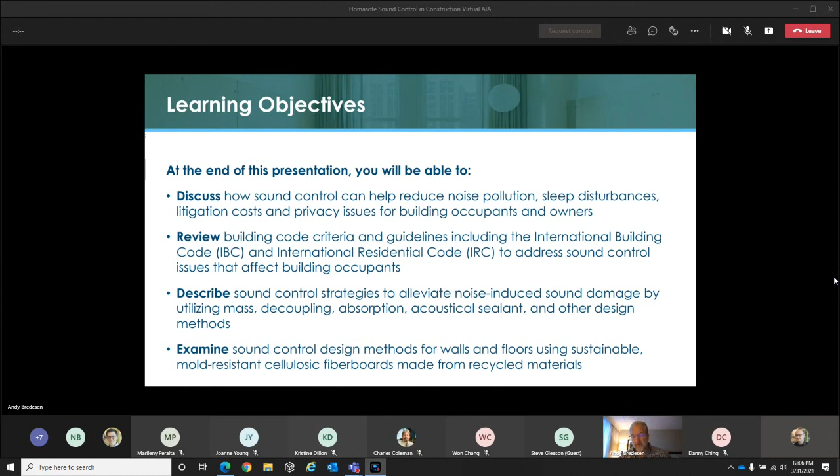The agenda covers 5 categories: sound control in the building industry, building code criteria and guidelines used to assess sound control, theory and the terms that go with it, the strategies of sound control, and finally addressing sound control issues.

So starting off, let's look at sound control in the building industry. There you go, noise pollution. It's everywhere, and it was everywhere before it became code in 2003 to address it in construction.

But so many times, especially in the last 10 years or so, people are moving to more metropolitan areas. Those without cars want to be by the metro line. And so builders are building high occupancy 2-over-2 townhomes and condos in communities where there's retail and restaurants, and there's also noise. So it affects all of us.

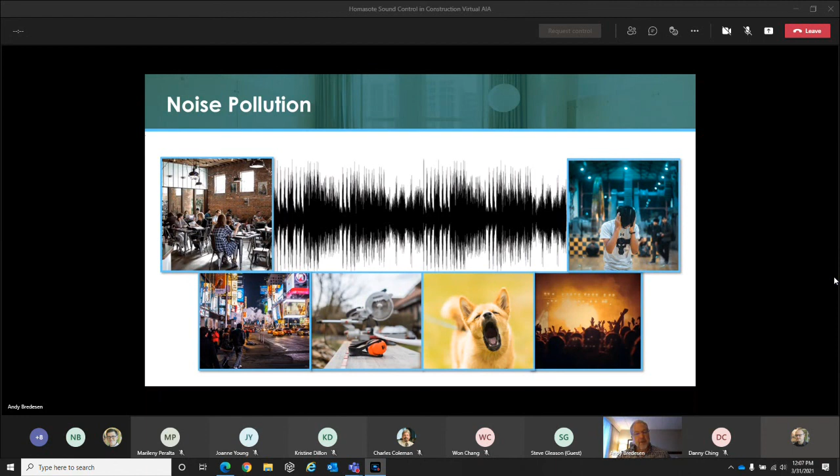The importance of sound control is different depending on your relationship to it. But to the consumer, it affects your sleep, your productivity, and your privacy, whether you're in your own condominium, apartment, or hotel.

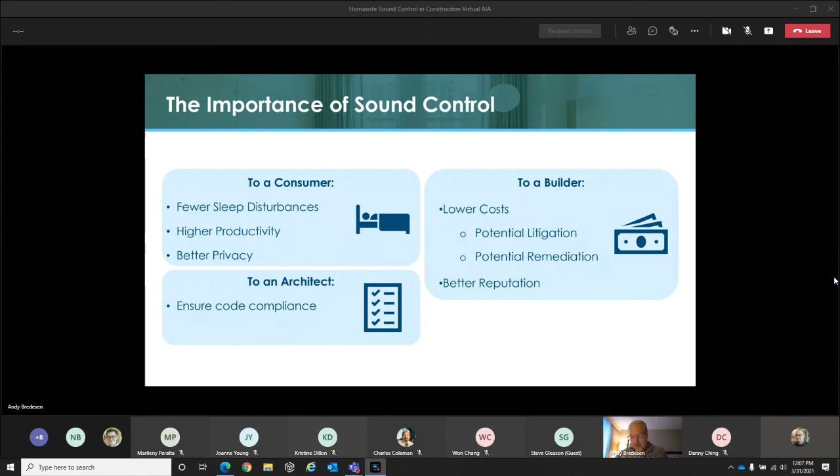To the architect, we want to make sure that we have code compliance. And for the builder, we want to make sure that we build to code so that we avoid potential litigation and potential remediation to bring things up to code. And that all affects the builder's reputation.

So cost considerations: when you talk about litigation, sound is one of the top 3 litigation costs behind mold and foundation settling. One major builder reported that they have at least 14% sound failures, and it doesn't always have to do with the product used to control sound, but its installation, and whether it's done correctly. When you talk about remediation costs, if a building does not meet code, it can exceed $32,000 per multifamily unit to bring it up to code.

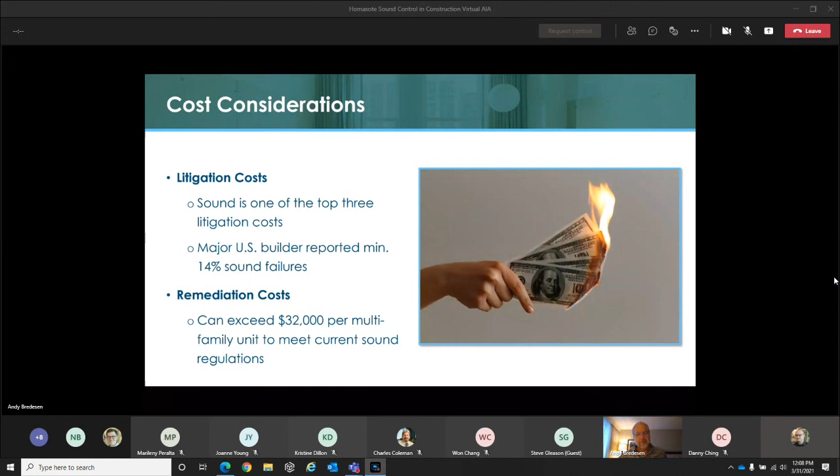So talk about reputation. I'm sure if we were in a room and I asked you to raise your hand for anybody that goes on to crowdsourcing formats like Yelp or others, you can relate to this. You don't just go looking for great restaurant reviews, but sometimes people go and complain, and this one we pulled off the internet.

The room was clean, the staff was friendly, but the walls must have little to no sound barrier. We would clearly hear conversations among other activity next door, and the guest above us sounded like he was walking in our room. We had to be moved at 12:30 a.m. We're never going to stay at this facility again.

If you're the owner of that hotel, you can't afford to have this put out there, and yet it's done every day. I would say, just from personal experience, I stay in hotels quite a bit, and even hotels that are newer and built after 2003, I still really wonder if they were built to code with regard to sound, because so much of the time you can hear conversations so easily in the room next door.

So where do we need sound control? I think we need it everywhere, but specifically, let's look at this. So multifamily is what we're addressing here: apartments, condos, dorms, senior housing, duplexes, townhomes, but not just residences. It's also for offices, hotels, education facilities, and healthcare.

So now let's look at the building code criteria and the guidelines that we use to assess sound control. IBC 1206, and this was changed a few years ago. It was IBC 1207. Up until recently, they changed it to IBC 1206, but we address two different ways of looking at sound. First is airborne sound.

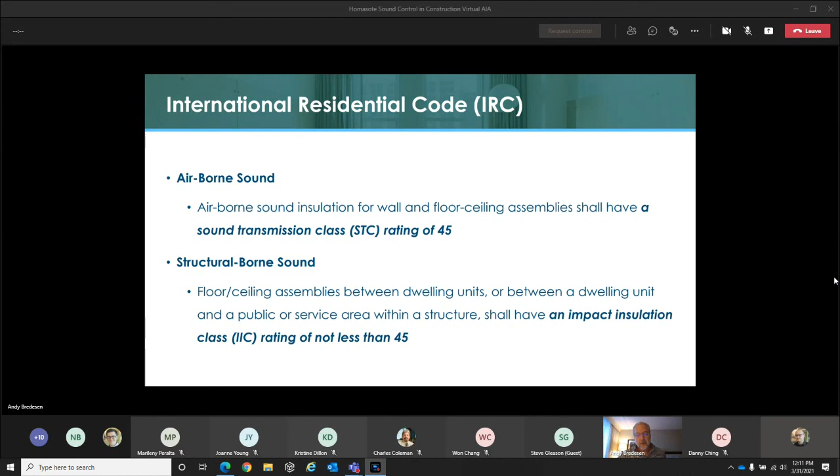So that's the IBC. And now we look at the IRC, the International Residential Code. They address both of these same sounds, air and structural borne, but they only require a 45. And let me back up a second and say that if you do field testing for the IBC, all you need is a 45 as well. So you can get it to a 45 by doing the field testing.

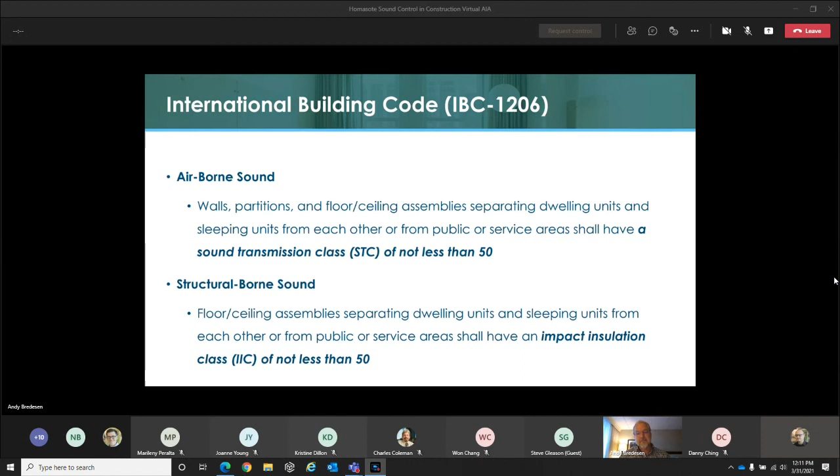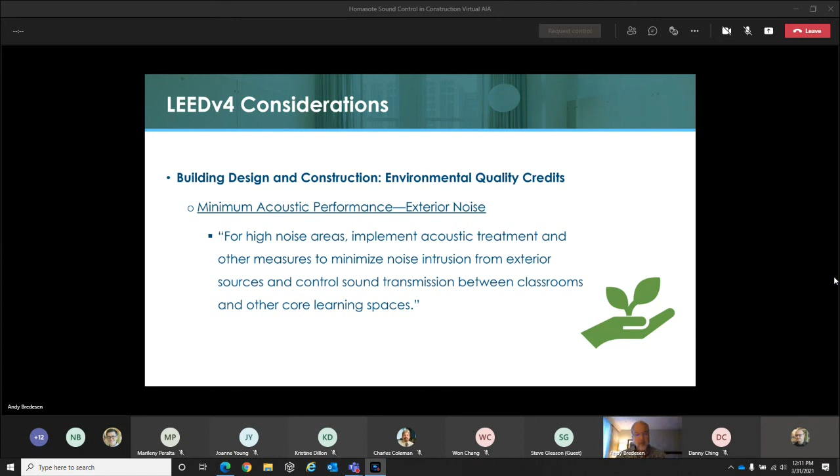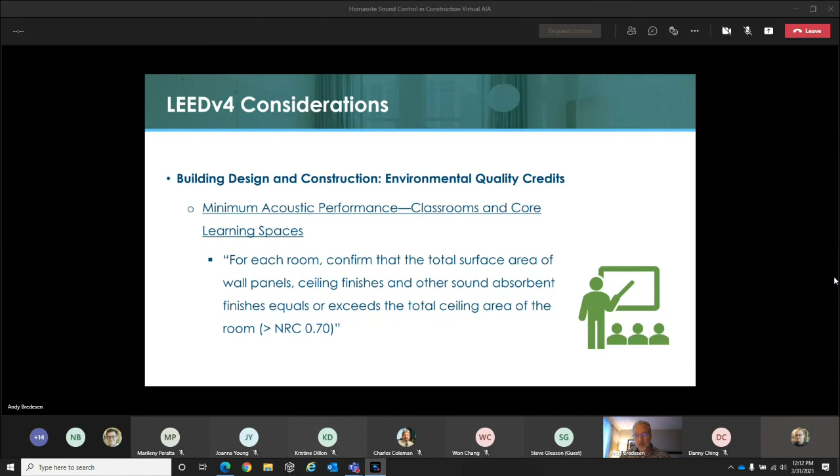So now, what are the sound control theory terms? I like this: when is something too loud? Well, I think this is very subjective. Something may be too loud for me, but not you, or vice versa. So it's subjective to the person.

It's said that noise-induced hearing damage is related to the duration and the volume of exposure to that noise. According to the National Institute of Occupational Safety and Health, the safe exposure limit is 85 decibels for 8 hours per day. And a decibel is a unit that measures the intensity of the sound.

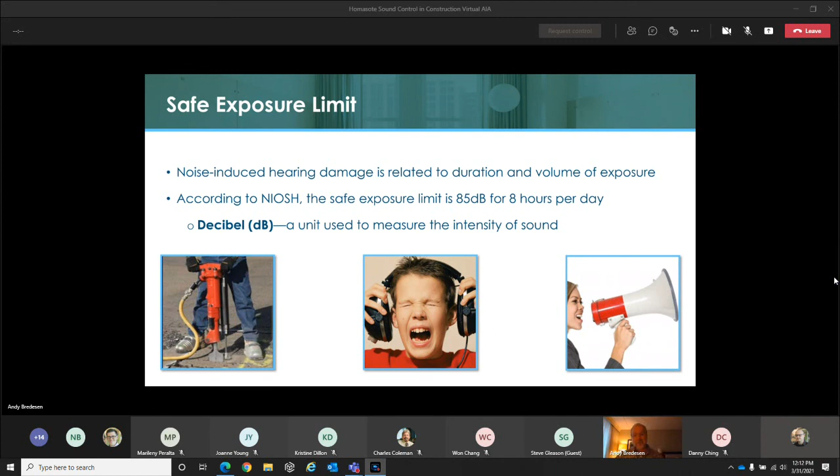And now let's talk about sound transmission class specifically. STC ratings assess a material or an assembly's ability to resist airborne sound transfer. The higher the number, the better the resistance.

So let's look at some of them—the STC ratings on the left. If you start at the first one, at 25, you can hear normal speech and it's understandable through the wall or the floor. Obviously that is poor. As you move up the scale there, you get to a 40: loud speech is audible, but you can't really make out what's being said. I'm not so sure that I would call that good.

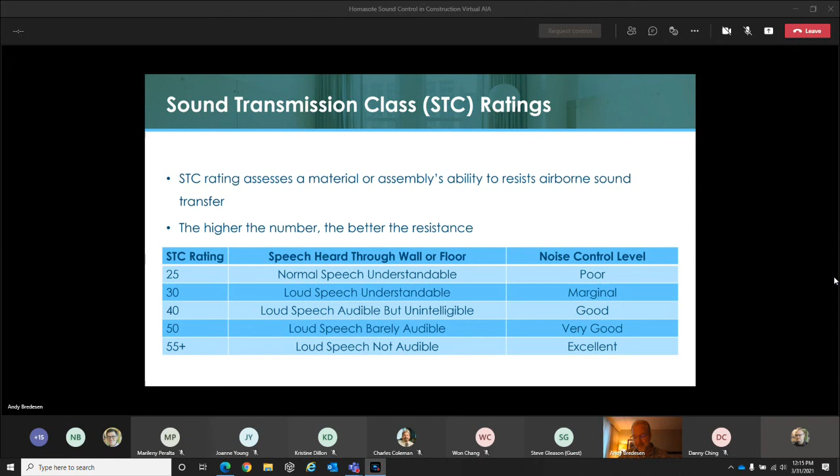That's considered very good, at least it's a benchmark for code to get us to a level where it's acceptable. And if you get above 55, loud speech is not audible. We're seeing also in some major cities like New York City, for buildings that have condominiums selling for $1 million, they're willing to put more money into the wall and floor because they want to get that floor up to an IIC of 60 or greater. It's too important for them not to have the owners of these properties satisfied.

STC testing, Steve's going to take this one. Sure, thanks Andy. So before we get into the nuts and bolts of how you would graph out an STC test, just a few words about testing in general. You're designing sound control components for a wall or a floor ceiling assembly. You're going to find there's a lot of acoustical spin out there in the marketplace. Get your hands on a sound test and read it and find your best way to understand it. There's going to be a lot of verbiage that gives you hints about or real data about how this assembly is designed relative to your needs - things like fastener size and spacing, joist spacing, joist size, types of insulation, types of drywall. IIC and STC testing documents are important.

Let's take a look at an STC test for a wall. The way they do this is they build the wall in a sealed assembly between two acoustically balanced rooms. They blast out 115 decibels in the source room and measure it in the receiving room and graph it out as you see here. The bottom horizontal axis is frequencies and the vertical axis is sound transmission loss numbers, and remember the higher number is the better number. They'll graph that as a broad frequency spectrum of sound - that's the blue line you see.

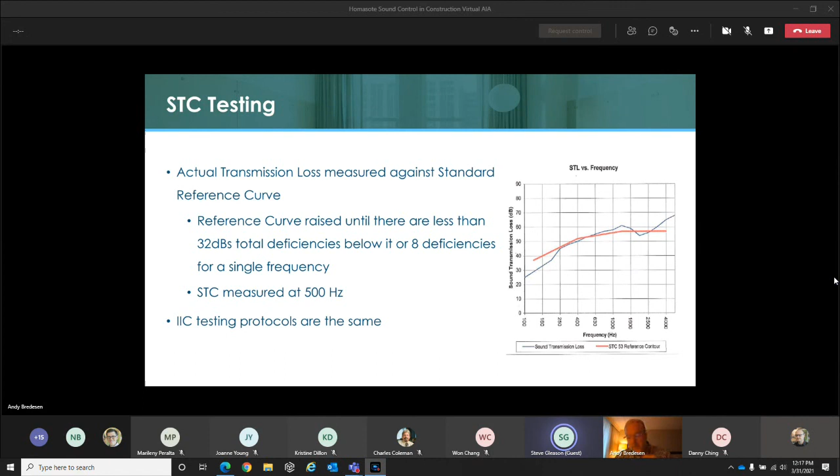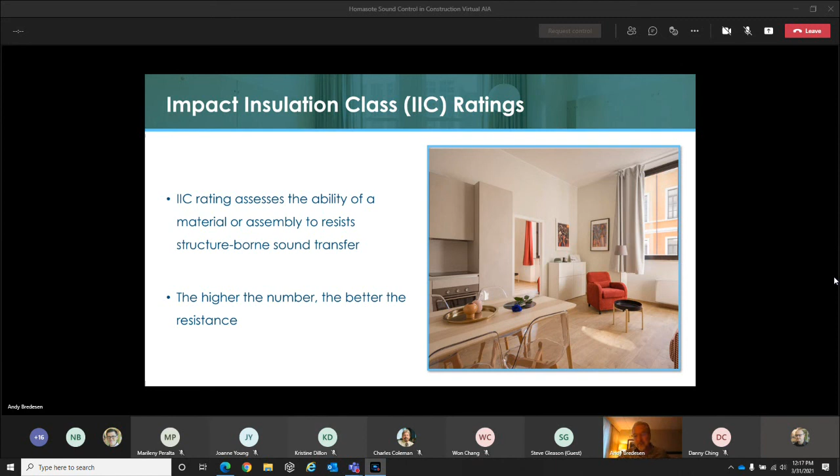Andy? Thank you. So now, impact insulation class, IIC. IIC ratings assess the ability of a material or assembly to resist structure-borne sound transfer - we're talking about floors here. The higher the number, the better the resistance. In multifamily, it's much more of a conversation about floors and the person living above you making noise than it is for the walls. They're both important, but floors tend to be the bigger culprit.

Steve? Sure. So an IIC test is graphed pretty much the same as an STC test, but the sound is a different situation. With airborne sound, STC, that sound wave is generated and comes across the room as a wave and strikes the wall. With impact sound, it's happening right at the surface of the floor. There's a picture of the tapping machine they use, and again, they measure it at 500 hertz.

The problem with IIC testing is that it does not accurately model what's going on in the low frequencies, because the machine is tapping hard, whereas somebody walking across a floor is actually flexing the whole floor. The sound develops in the cavity of the floor ceiling assembly and it's a low frequency sound. So that's somewhat problematic, and it's something you have to look at - when you look at those transmission loss numbers, you can really see what's going on.

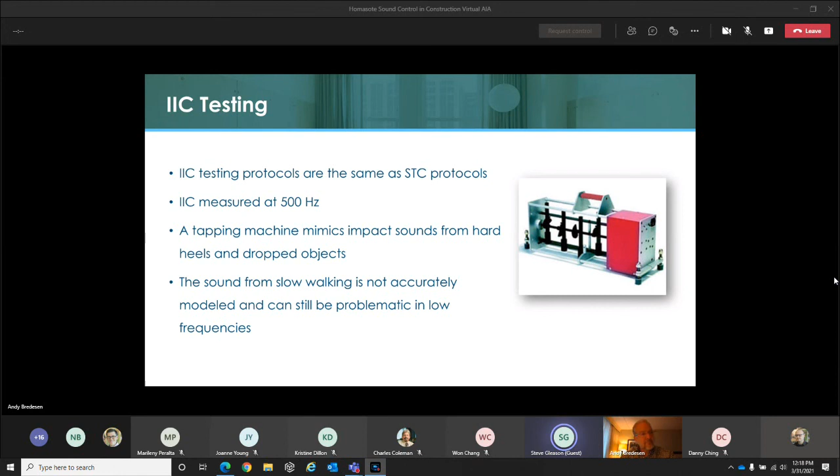So, noise reduction coefficient, NRC - we mentioned this earlier. This rates the effectiveness of a material in absorbing sound. So now we're not talking about sound going between spaces or rooms or apartments, we're talking about internal to that room. A zero NRC means it's mostly reflective, a 1 means it's mostly absorptive. So it goes from 0 to 1.

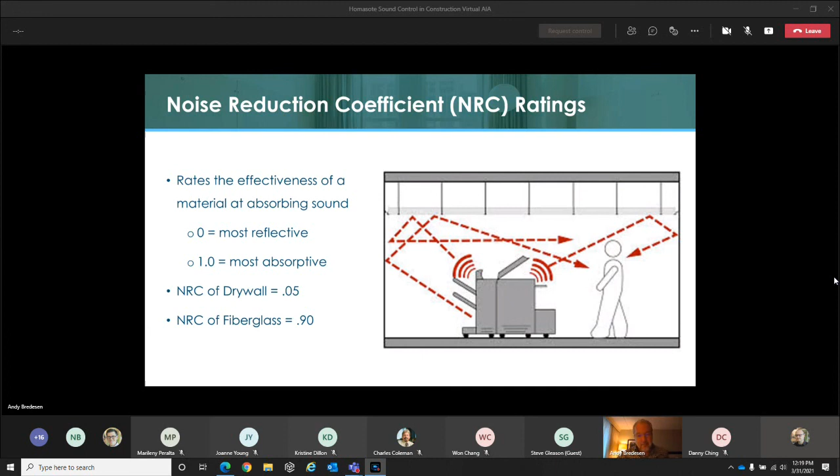Two examples: drywall has an NRC rating of 0.05 - it's easy to understand, it's very hard and dense and highly reflective. But fiberglass, on the other hand, is a 0.9 because it's almost perfectly absorptive.

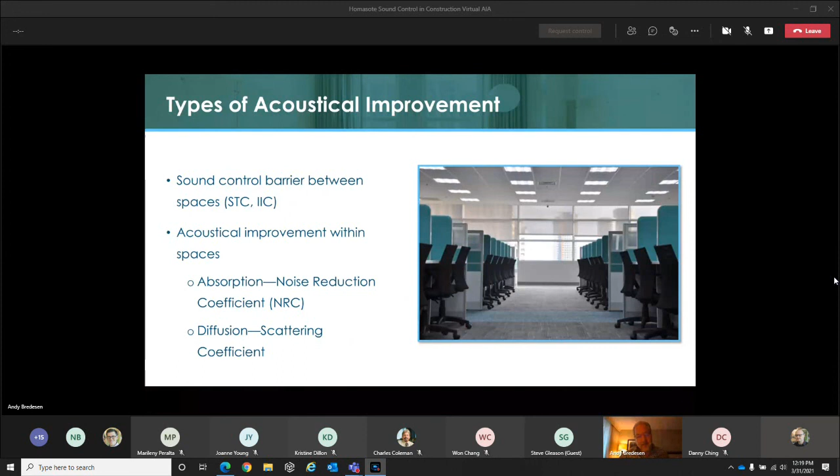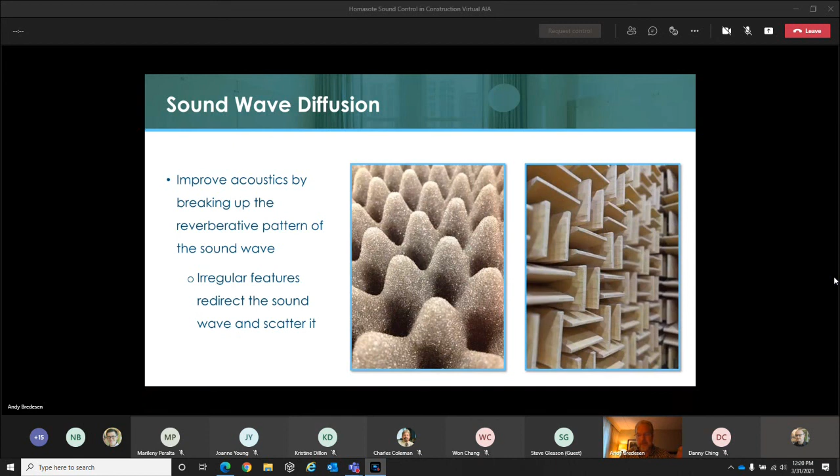Flanking sound — this is a problem. Sound passes through small openings. A 1/16 of an inch opening in the bottom of an STC rated 50 wall reduces that STC rating to 32. It's such a small thing to overlook, and yet it short circuits the entire project, taking it from 50 to 32.

So what do you do? You wrap backs of outlets, switches, and recessed lighting units with putty pads. You float the wall edges and seal those gaps with acoustical sealants. Think about the ductwork in walls and ceilings and creatively route that. And fit doors well with side seals and tight sweeps if you really want to control the noise.

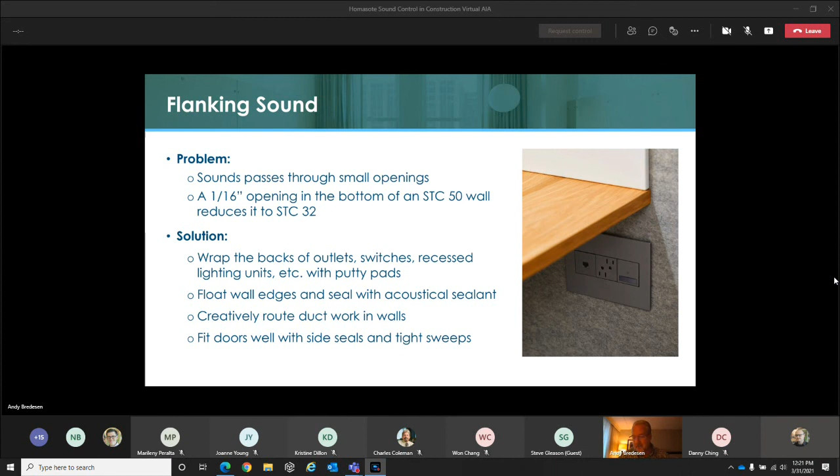Often in commercial office spaces, it's not something that you're doing on these doors — there are gaps beneath them. So if sound is a critical thing to block off in a particular boardroom or conference room, those things would have to be dealt with.

And use pattern matters — how spaces relate to each other will dictate the sound attenuation measures. You might have in a multi-use building, rock and roll music in one room, and on the other side very quiet music for some counseling. So what the room is used for matters, and we're going to address controlling sound by what we put between the floor and between the walls for different uses.

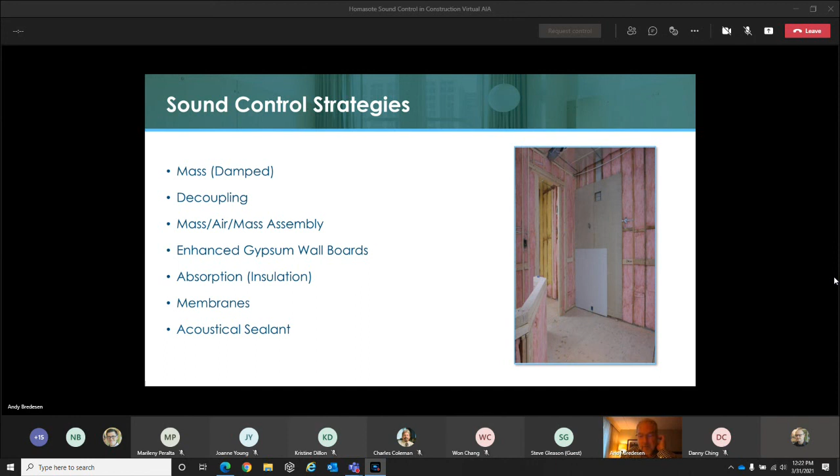Now let's look at strategies of sound control. Here's the hot list, the good topics. Mass — we're going to use mass and damp that mass to stop sound. We're going to use decoupling, or a mass-air-mass assembly, or enhanced gypsum wallboards, or absorption with insulation, other membranes, and finally acoustical sealant.

Steve: Sure. So one of the things we're trying to do with this presentation is give you a better idea of some of the dynamics of sound control, to kind of take the curtain aside as to what's happening. As we go further through, starting right here, we're going to show you some of the ways this really works. If you can understand how the dynamics work, it'll be helpful in making these designs.

We start with mass law. Mass law tells us that when you double the mass of an assembly, you gain 6 decibels of transmission loss. That's a limitation. A 9-inch brick wall is going to stop a lot of sound because it's non-resonant mass. But we can't build with 9-inch brick walls.

So what we're going to be doing is trying to figure out how to get around mass law using conventional construction materials, and not having to just rely on straight mass. As we go forward, that's exactly what we're going to do.

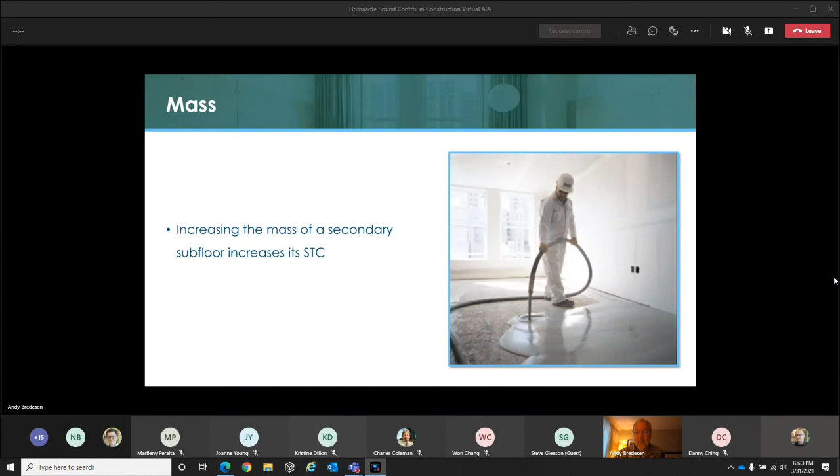Andy: So starting with mass as the first method, we can increase the mass of a secondary subfloor and increase the STC rating. You'll see here that there's lightweight gypsum being poured. In this example, perhaps it's acceptable some places, but not most — typically an acoustomat gets put down and then a thickness of the gyp pour over it to equal what they need to gain the STC and IIC. Also, here you're adding tons of moisture to the building, and then you've got to worry about drying it up. But it's one way you can increase that secondary subfloor.

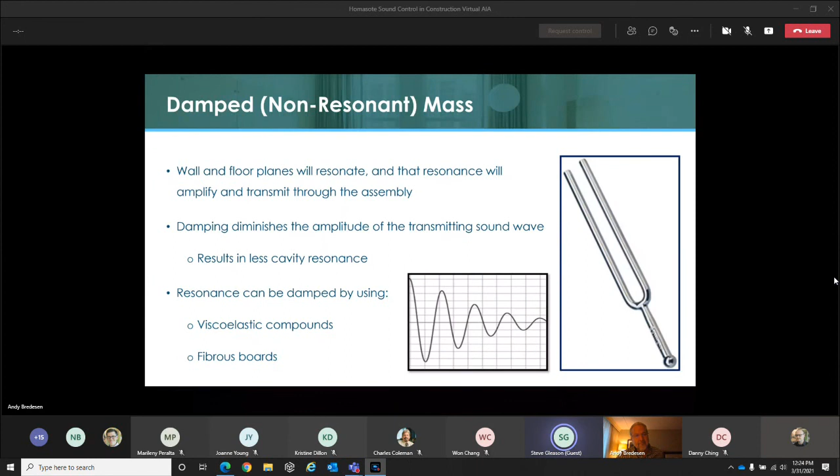Another method of damping mass is increased damping of a secondary subfloor, which increases the STC and IIC ratings. In this case, you've got a fibrous cellulose board in lieu of doing a lightweight poured gypsum. You attach that fibrous board to the subfloor with adhesive and screws. You're not adding water, and you're damping the resonance and damping the mass.

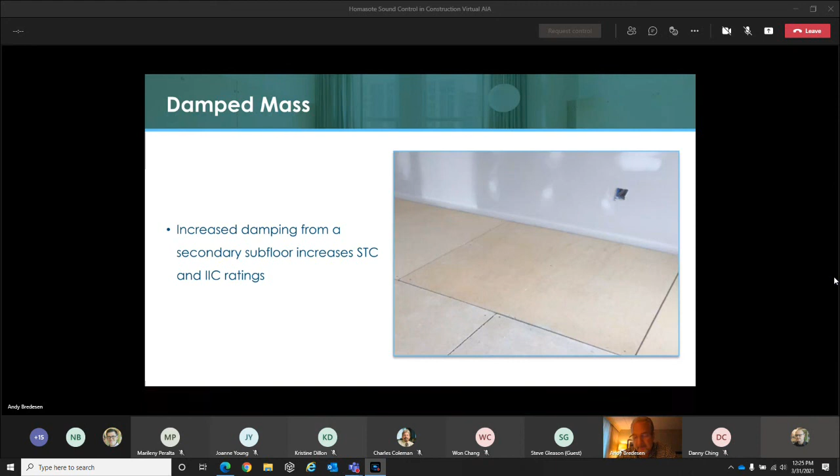Decoupling is the second dynamic we like to introduce to cheat mass law. Poured gypsum on a floor is just solid mass, but when you use a sound mat underneath it and decouple it from the subfloor, you're going a step further. True decoupling would be a double stud wall. The sound wave travels through the wood studs at approximately 12,000 feet per second. When it comes into that air pocket, it has to slow down to 1,200 feet per second, and that shears the sound wave off, shearing the acoustic energy into heat energy.

You can also decouple the wall using resilient channel. I'm sure most of you are familiar with channel. Not only does resilient channel decouple and add that airspace, but it gives us a third way of getting around mass law, and that is planar flex. If you have a flexible wall plane, when the sound wave hits it and it's able to flex just a bit, it shears that energy off.

One of the problems with resilient channel is that it's very easy to short out the wall. If you put as few as 6 or 8 screws through the channel and into the studs accidentally, you're going to lose 2, 3, or 4 decibels of sound transmission loss.

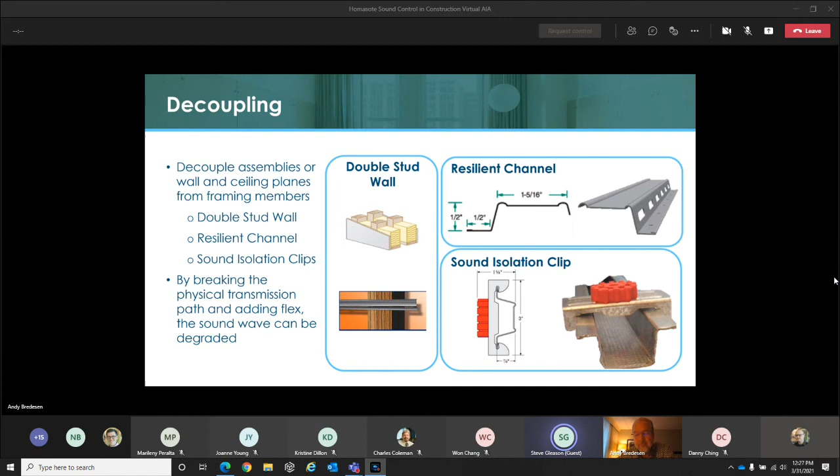The main thing you're doing within an assembly is creating a mass-air-mass assembly. This is the main way we're cheating mass law. You're creating an air pocket that the sound wave gets trapped in — it resonates back and forth, and in that pocket, the air is able to absorb the sound. We can put a little insulation in there, and that helps the air absorb the sound.

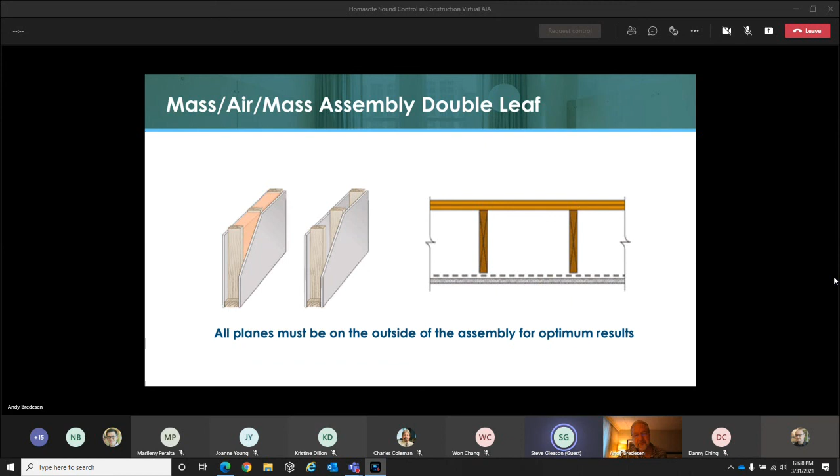It's very important to have all of the planes of material, the leaves of material, only on two sides of the wall. If we go to the next slide, we can address that.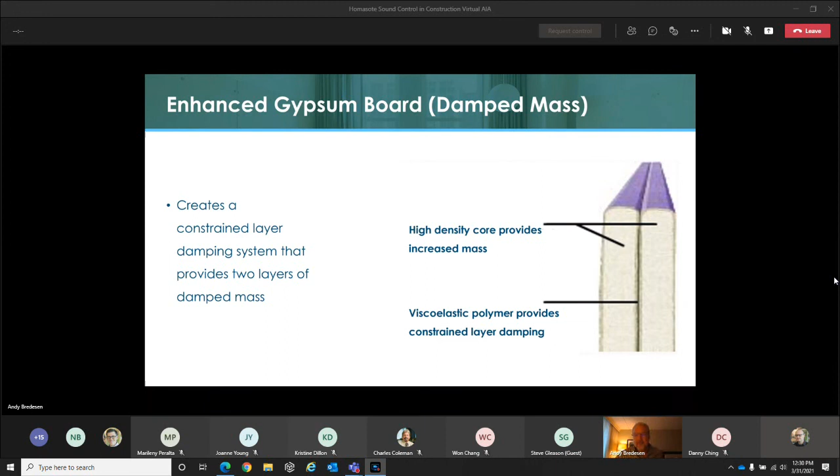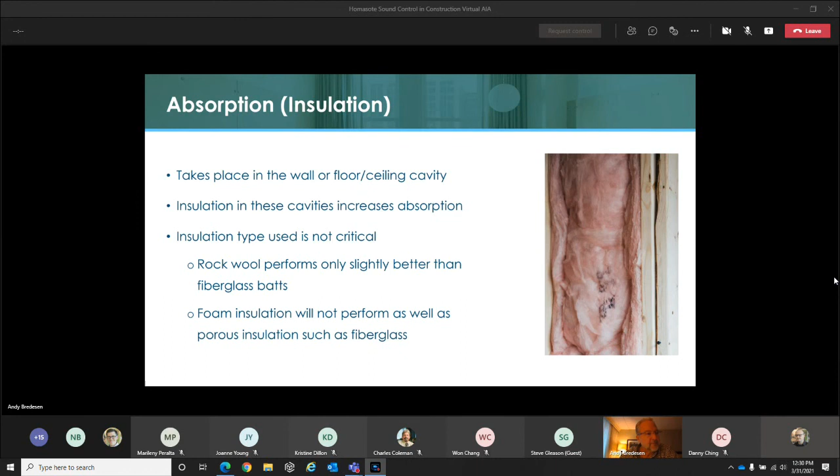So unbalancing is the next way we're going to talk about getting around mass law. There are 2 ways to unbalance a wall. The first is to unbalance the cavity. We spoke about cavity resonance a couple of slides ago when talking about multiple leaf construction. The cavity is an important part of a 2-leaf assembly, but it can also cause problems, because when a 2x4 wall is built with gypsum board on both sides, as it usually is, it's going to resonate at around 125 hertz. That resonance dip in a test is going to kill the test.

Because it's a very symmetrical resonance, one way to get around that is to replace one of the sheets of gypsum board with a fibrous soundboard, a cellulosic soundboard. That has a noise reduction coefficient higher than sheetrock. Sheetrock, as Andy mentioned, is 0.05 NRC, which is very reflective. A cellulosic fiberboard with a noise reduction coefficient of 0.20 is absorbing a little bit more sound. So that resonance becomes asymmetrical. It gets unbalanced, and you can lower that 125 hertz troublesome resonant zone down to 60 or 80 hertz. Not only does it get it out of the critical range of the sound test, but it actually makes the wall sound better.

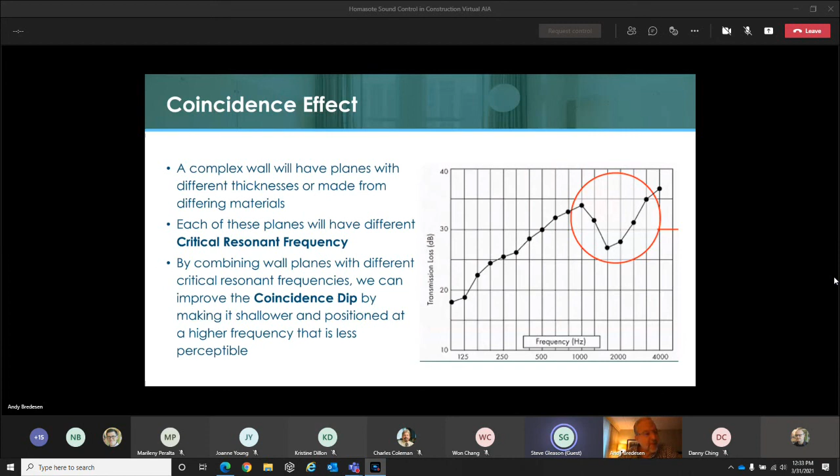A 3/8 inch thick piece of gypsum board is going to resonate at 4000 hertz, and a piece of fibrous soundboard, a cellulosic board, will resonate at 4400 hertz. So by mixing those planes up in the same assembly, you're unbalancing the wall, and you can take that coincidence dip that you can see circled in red, and make it shallower, and also move it further up into the higher frequencies where it's not so problematic. This way you're unbalancing the wall through planes of material.

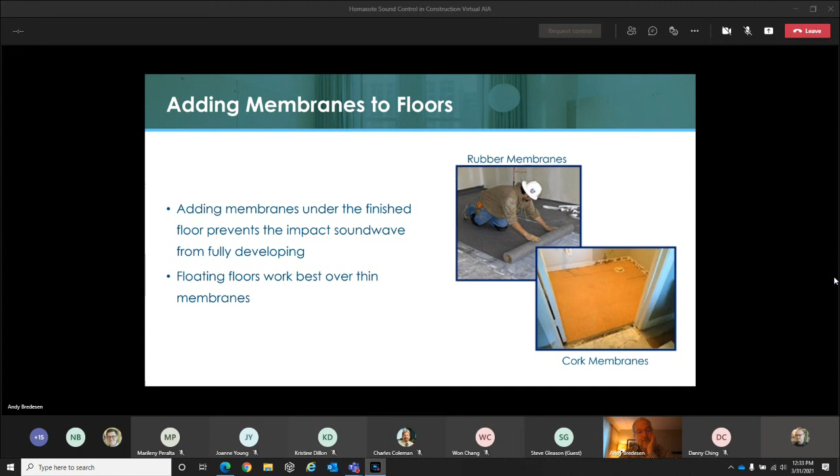Thank you. So another thing we can do is add membranes to the floors. Adding membranes under the finished floor protects or prevents the impact sound wave from fully developing. So you might put rubber membranes down or cork membranes down. Floating floors, so often used in an LVT example, work best over a thin membrane.

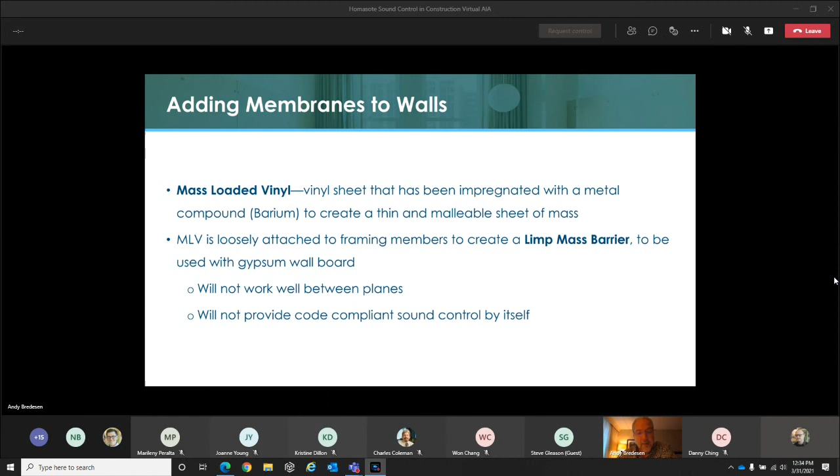Adding membranes to the wall, we could talk about mass-loaded vinyl, a vinyl sheet that's been impregnated with a metal compound, barium, to create a thin and malleable sheet of mass. Mass-loaded vinyl is loosely attached to framing members to create a limp mass barrier to be used with gypsum wallboard. It will not work well between the planes, and it will not provide code-compliant sound control by itself.

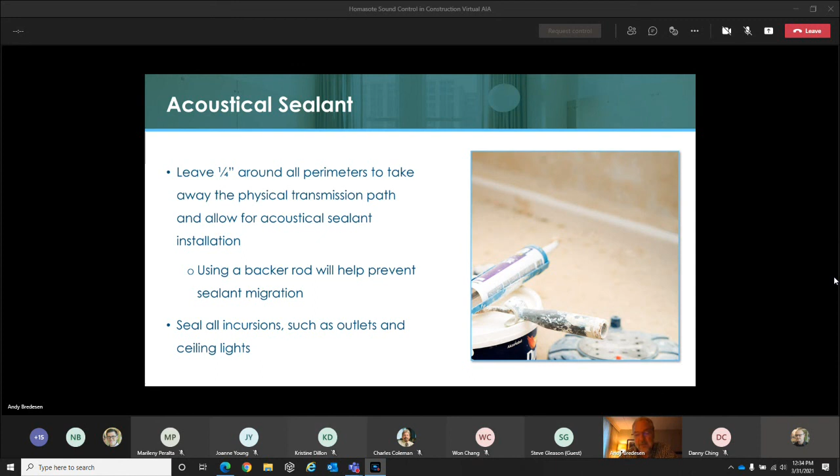We can talk about acoustic sealants. We talked about not having the floor and the ceiling connect to the walls, leaving a gap there. So leave a 1/4 inch around all perimeters to take away the physical transmission path, and then allow for the acoustical sealant installation. Put a backer rod in there first, and then the sealant over the top. The backer rod's going to keep it from migrating. And then seal all incursions, like outlets and ceiling lights where there are openings as well.

Here's a number of different components that we can add to get improvements. These are approximate improvements. Starting with wood fiberboard, you can change the decibel by 1. Type X gypsum wallboard, 3 decibels. Type C gypsum wallboard, 4 to 5. Insulation in that wall cavity, 4 to 6. RC channel that we talked about, 6 to 8. Isolation clips, 8 to 10 decibels. Mass loaded vinyl, 9. A cellulosic fiberboard, 10 to 12. And specialty drywall, 10 to 12.

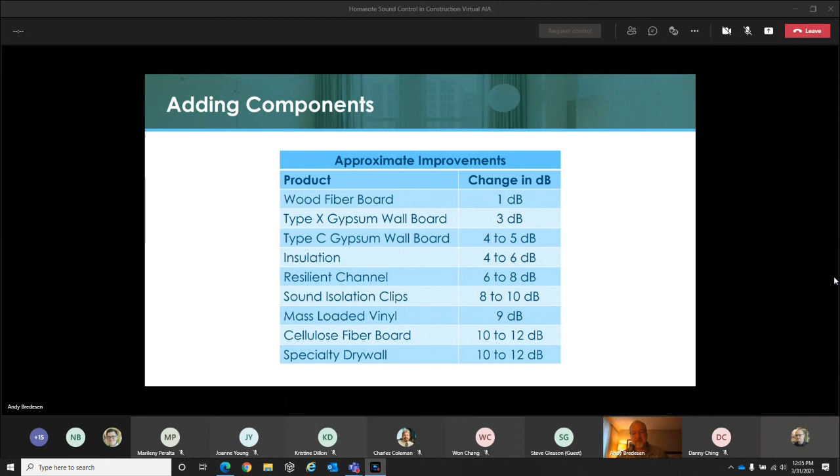So again, I guess it's a combination of looking at the cost of each one of these and the gradual increase in improving the sound. And finally, the last section is addressing the sound control issues.

So unimproved assemblies, you're going to start with a wall like this. You have an STC of 36. It's a common wall. We know that that's not a good enough between living units, and we need to get to an STC of 50.

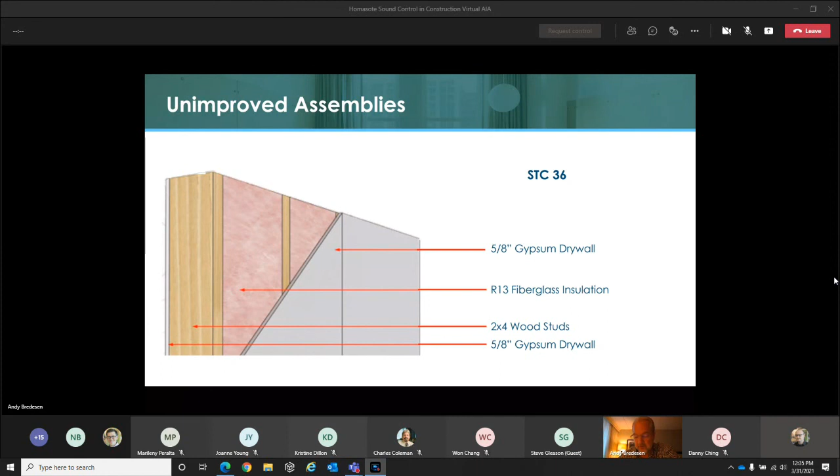Add some insulation into that cavity, which helps the absorption in that cavity. And you can pick that STC up to 36 to 38.

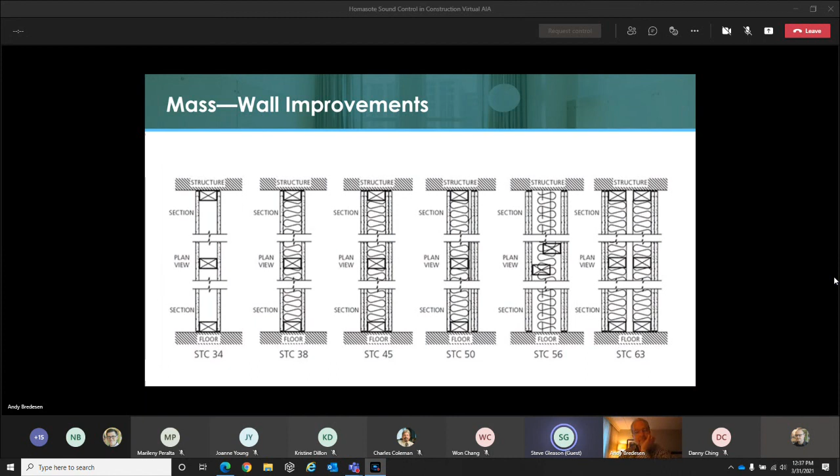Let's go to that next slide. Thank you. Yep. So here we have cheating mass law. Let's look at some typical ways that we're doing this and how we've accomplished it.

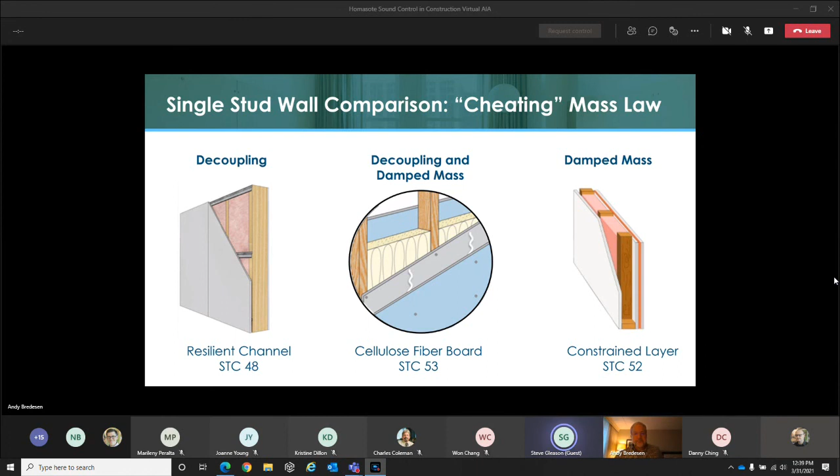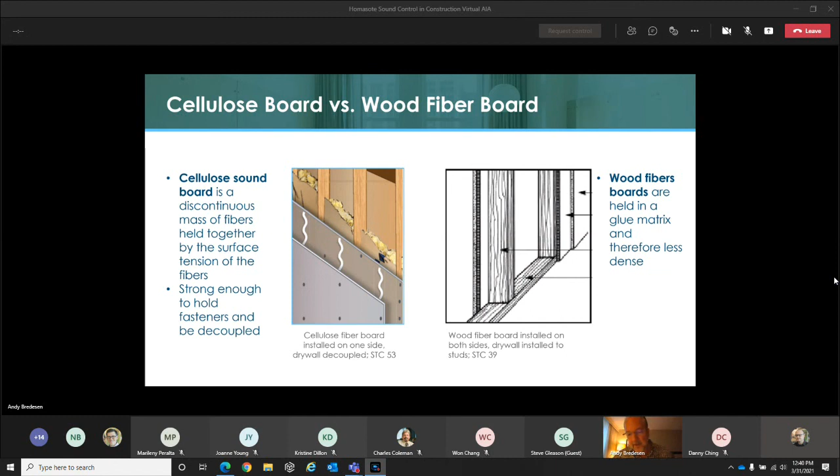Remember we talked about the fact that with impact sound and with floor assemblies, we're talking about IIC, impact insulation class. The sound wave is generating in a different way than with STC. With your wall, or with a ceiling, the sound wave is generated in the room and it's a wave that's hitting the wall. But with a floor, it's happening right on the floor, so what you do on the surface of the floor is important.

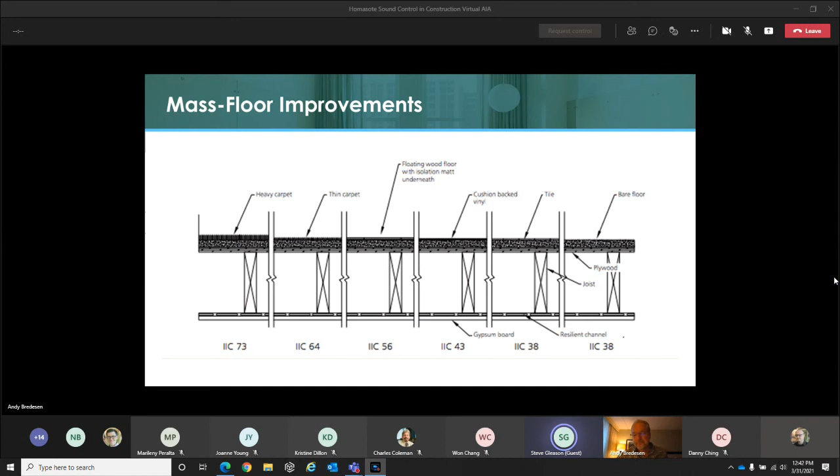You can do the same things with floating wood floors that have a little isolation sheet underneath it. Your IIC picks up. When you get to carpet, you're obviously really degrading that sound wave. A thick carpet is going to do best. Even over OSB, without even gypcrete, you're still going to get into the 60s with IIC.

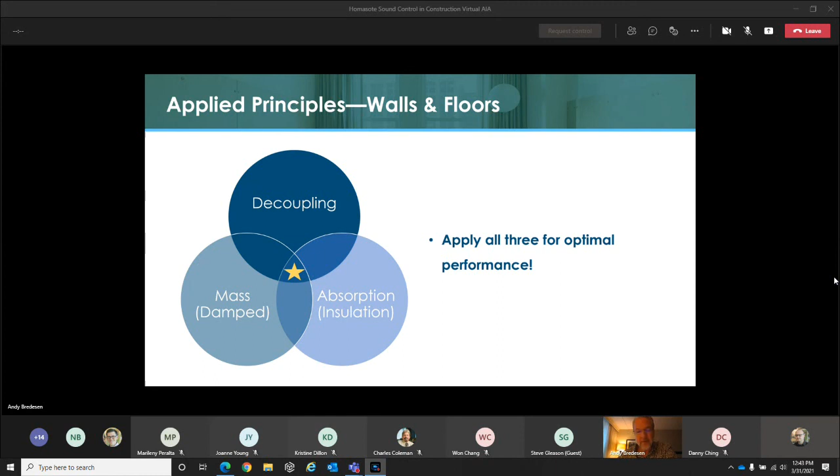When we talk about applied principles that apply to both walls and floors—decoupling, damping the mass, absorbing the sound through insulation—all 3 are best. That's where you're going to get optimal performance. So if you could do all 3, where they overlap will be the goal and the highest performance.

We always want to recommend acoustic consultants. It seems so often that most projects now have water intrusion consultants—they're standard, moisture intrusion consultants are on every job. I think the use of acoustical consultants is also growing, and we always want to promote them as someone that perhaps an architect or building owner would consult.

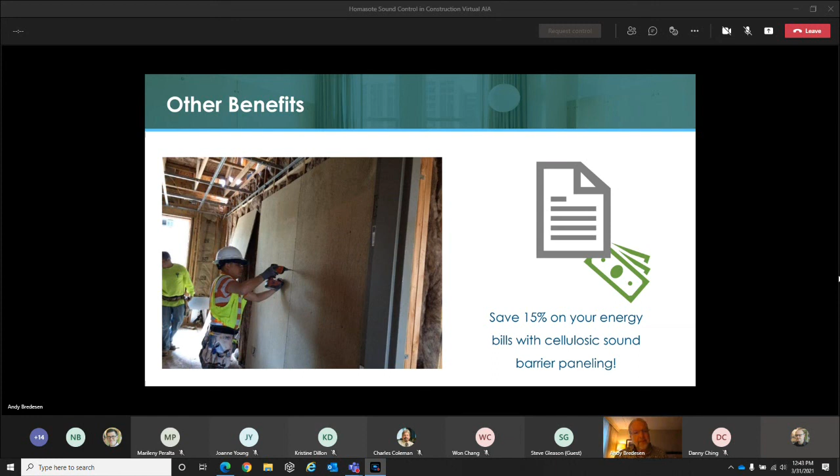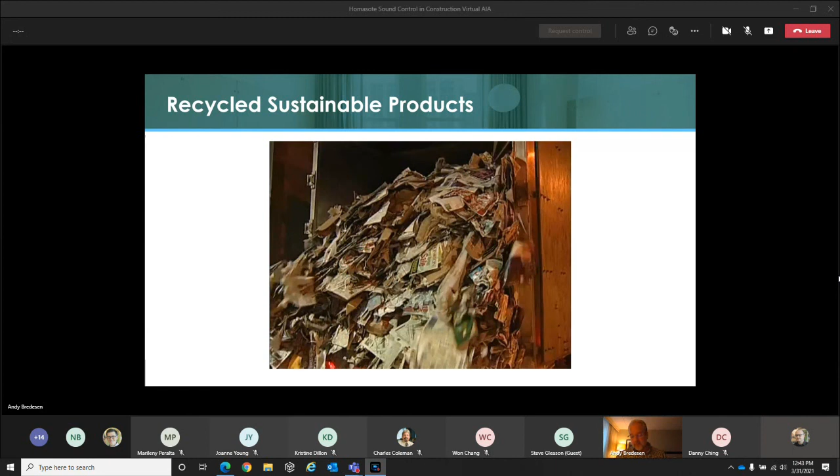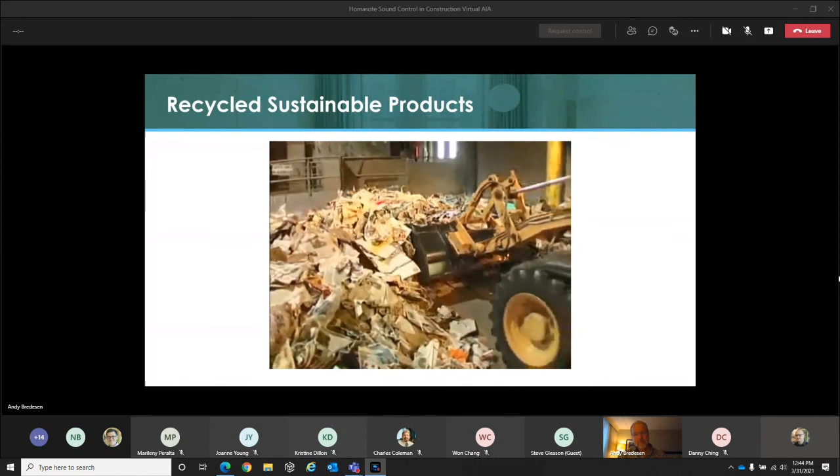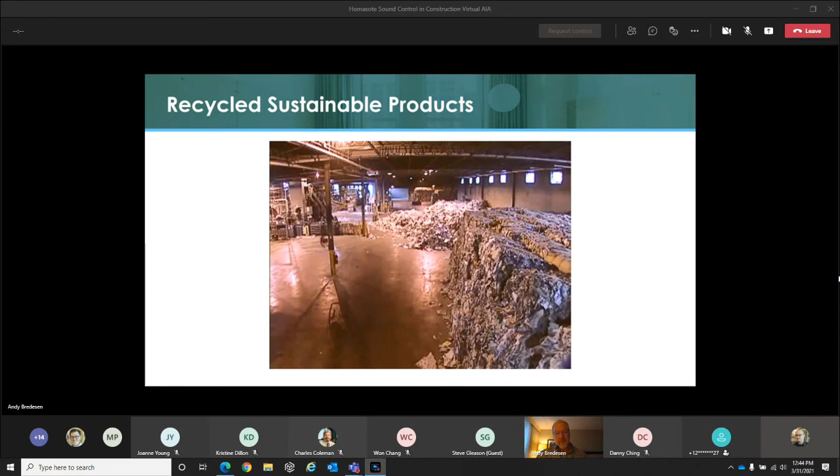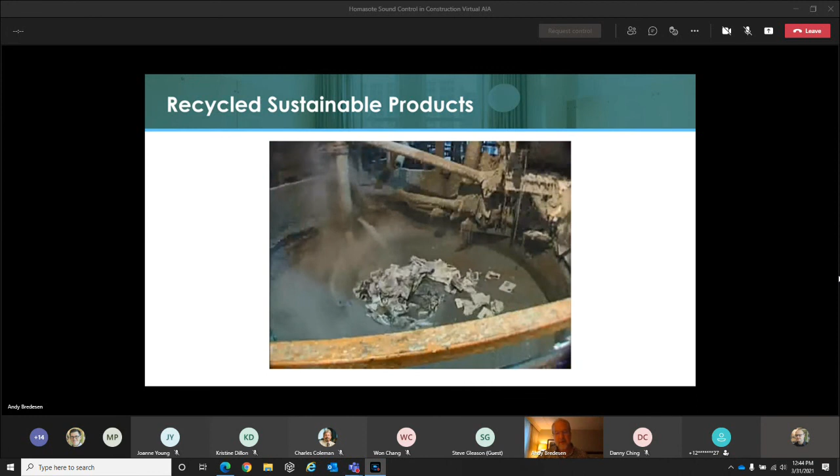What you'll see here is about a 30-foot diameter hole in the floor of this factory, about 20 feet deep. This recycled paper and cardboard gets put into that hole with water and 2% paraffin. It spins, and through centrifugal force takes out anything that shouldn't be in there, like a piece of glass or a wire or a stone. It filters all that out, and then processes this product into a cellulose fiber board.

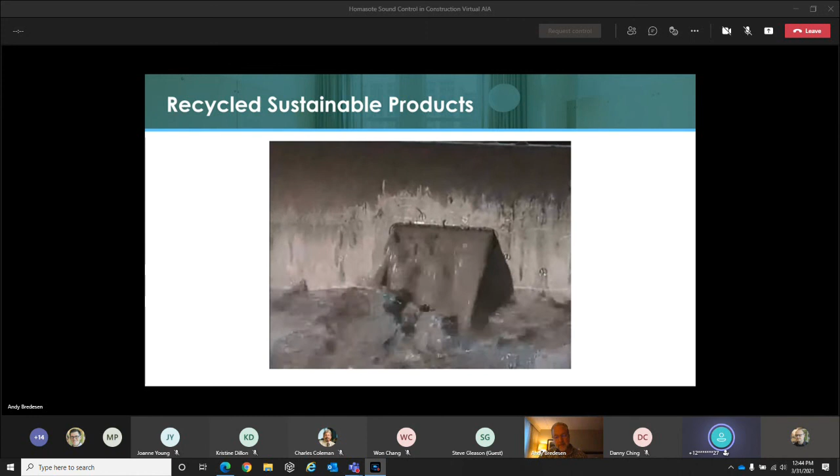That vat there is 8 feet by 12 feet, and what's coming down on it is a screen that pushes out all the water, reducing the thickness of 2 feet down to a half of an inch, or 5/8, or 3/4—whatever their desired thickness is. It goes through a dryer and then comes out into this structural board.

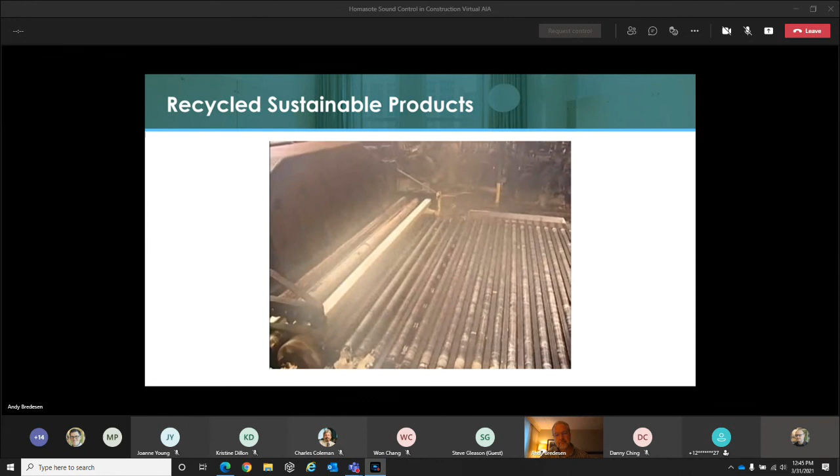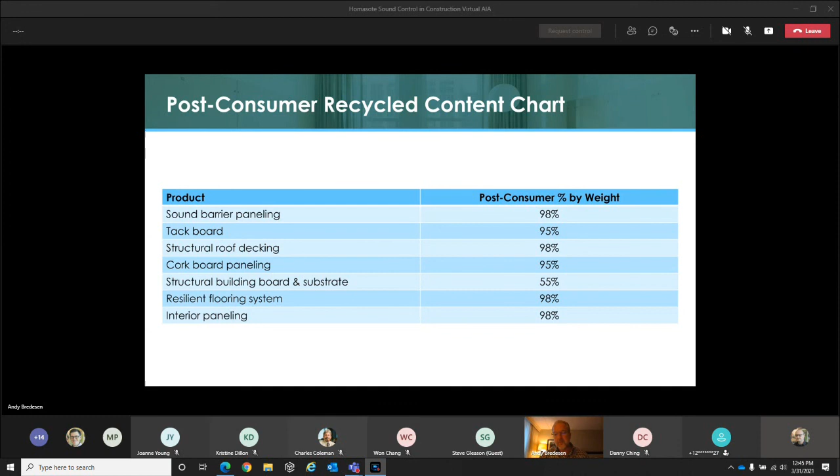So, post-consumer recycled content chart of all the products listed here, the only one that's less than 95% on the post-consumer percent by weight is the structural building board and substrate. But for the sound barrier paneling, the tack board, structural roof decking, cork board paneling, resilient flooring system, and interior paneling, they're all using a high percentage of post-consumer weight.

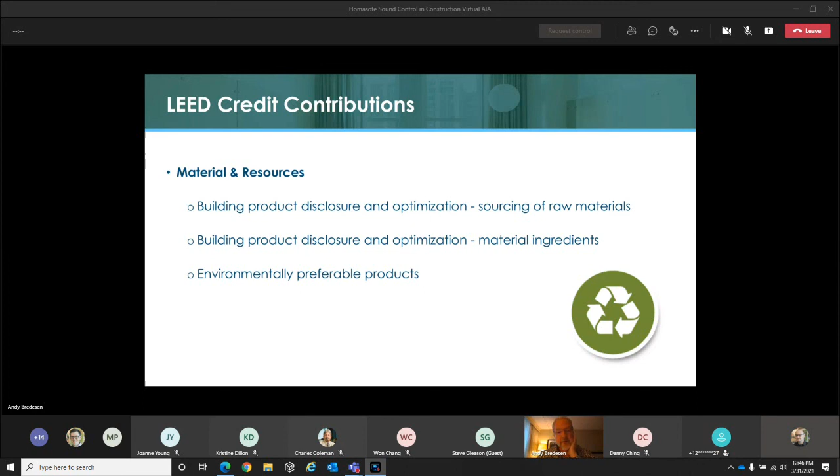LEED credit contributions: material resources, building product disclosure and optimization, sourcing of raw materials, building product disclosure and optimization for material ingredients, and environmentally preferable products.

So the review is the sound control in the building industry we discussed, the building code criteria and guidelines, the control theory and terms, strategies of sound control, and then how do we address those sound control issues. So these are the objectives that we set out in the beginning, and we've accomplished that.

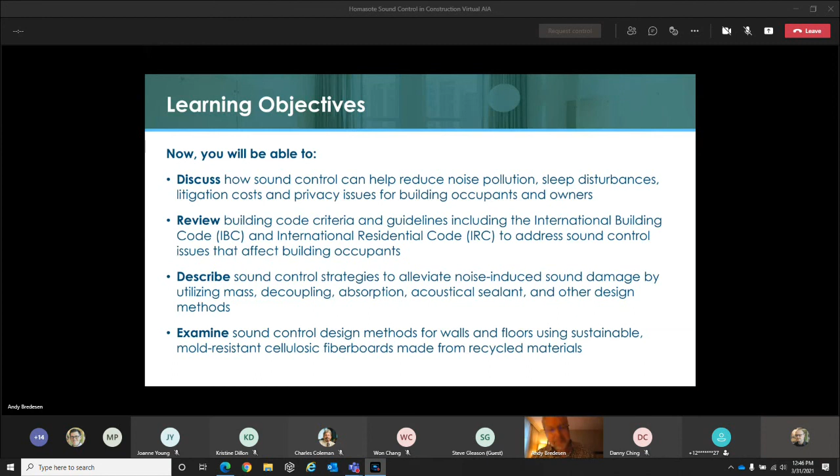With the few minutes that we have left, is there any questions? I have a couple. Sure.

Maybe you said it, but has the cellulose fiberboard been tested for fire rating?

Sure, let me handle that, Andy. There are two fire ratings. There's ASTM E84, which measures a component for flame spread, but the more important one, which I think you're referring to, is ASTM E119, where UL measures for fire resistance. This cellulosic fiberboard is approved for use in UL assemblies, about 100 or so. The gypsum board in these assemblies is always the first line of defense against fire, and IBC has a rule stating that once you've proven fire resistance on an assembly, you can add a plane of material in any position on that assembly. The maker of this cellulosic fiberboard has tested it per ASTM E119, and UL approves it for use.

More questions? Yeah, my other question was, we often get OSB in our corridor walls or even in our demising walls, and that's generally a negative impact on STC. So what do you do then? Well, not necessarily, but you can. That's a good layer of mass, so if you're just dealing with mass, you're adding mass to the wall, but OSB can be damped. It's stiffer than drywall would have been by itself. The reason OSB is usually in there is to establish shear, to prevent racking.

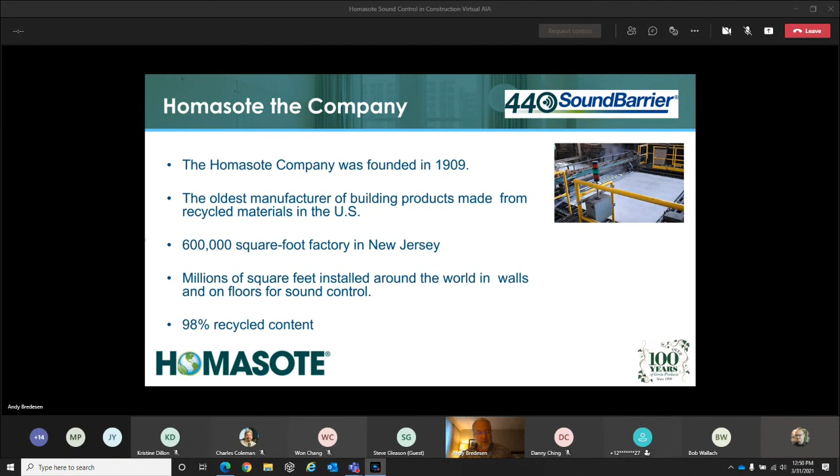Homasote 440 sound barrier has been installed in millions of square feet around the world in walls and floors for sound control. As I mentioned earlier, it's 98% recycled content. We add 2% paraffin wax as a binder, which gives it a very good relationship with water. We also add 0.1% of a copper metaborate, which makes it so termites don't want to eat it, and mold is not favorable for growing on it. So important.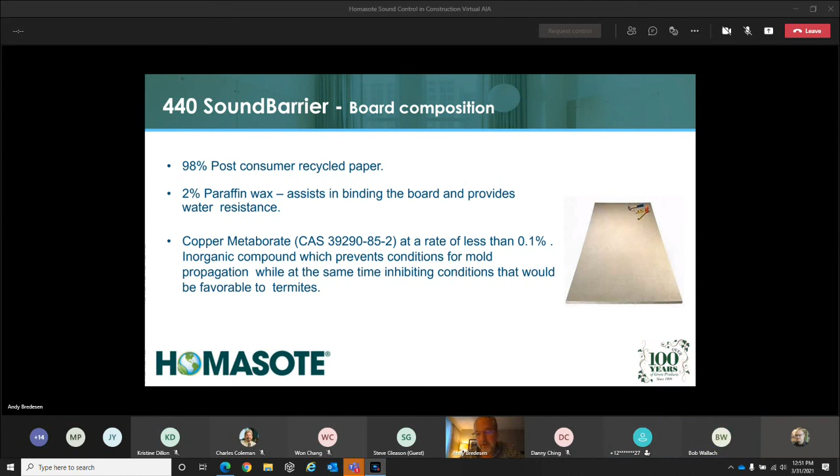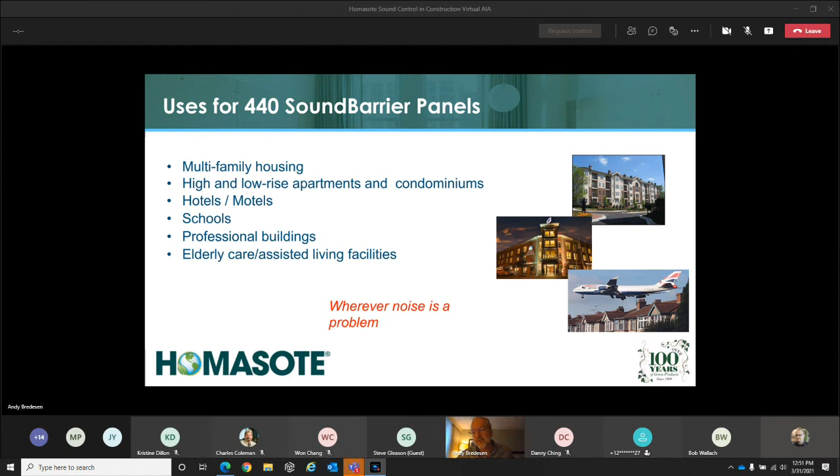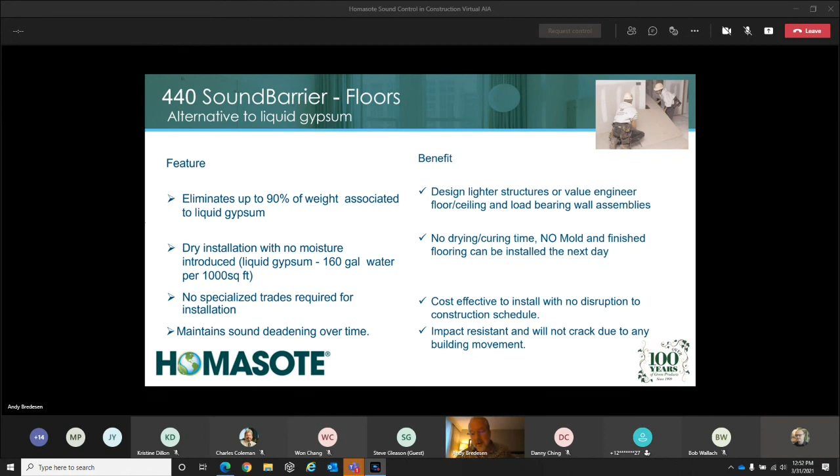We're used in multifamily, that's the goal. IBC Section 1203, or Section 1206 since 2003, has given Homasote new life in these processes, in walls and floor assemblies, to meet the STC and IIC requirements. When you compare us directly to a liquid gypsum application, we eliminate 90% of the weight associated with liquid gypsum. You can get perhaps some value engineering in your trusses. It's dry, so you're not adding water, you don't have to worry about curing. I've had builders tell me they're never sure if that interior closet or bathroom was fully cured before continuing construction. You don't need a specialized trade for installation, and we do all the training for anybody doing a project. We maintain sound deadening over time. We're not worried about somebody setting a refrigerator down too hard the first time someone moves in and starting a crack that would migrate over time through the unit.

One of the nice things too is that we don't disrupt the schedule. Time is money, and if you have to wait for gyp to dry, depending on the humidity and temperature, it could be days. With Homasote, once it's done going down, the guys walk out and the other guys putting trim on come right in, start putting the trim down, adding the doors. We don't disrupt the schedule.

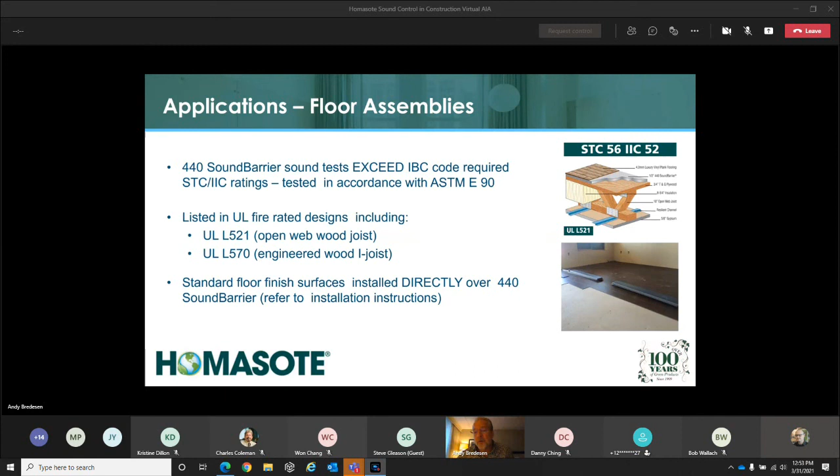So here's a UL L521, very common especially now with the advance of LVT. As long as you're going with a 4 millimeter or thicker over the 1/2-inch Homasote onto the subfloor, we're damping the mass, and it's one of the most successful applications in the UL. Like Steve was saying, we're in that assembly that's UL rated.

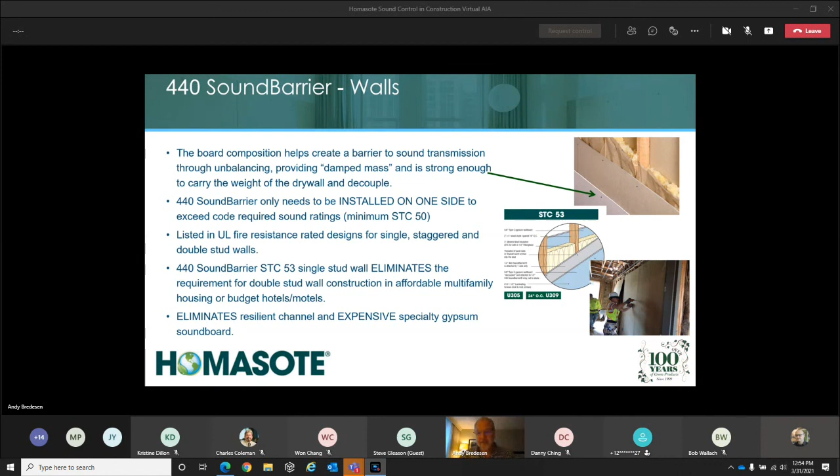So we talked about the walls. Again, you can put Homasote on just one side of the wall. It's structural enough to hold the weight of the sheetrock. There is also some adhesive required, and then it's an intimate contact with the sheetrock. It's damping the mass, and we can get to that STC 53 with the U305.

Here's some recent projects: 2010 Walnut Street in Philadelphia, Agupol Construction with the architect shown there. We found also that when you have infill projects, inner city in tight spaces where there's 1, 2, or 3 buildings, it's tougher to get on the gyp guys' schedule and they need product now. We're winning a lot more of those smaller projects, and then we're becoming introduced to the builder because of the speed of getting the product.

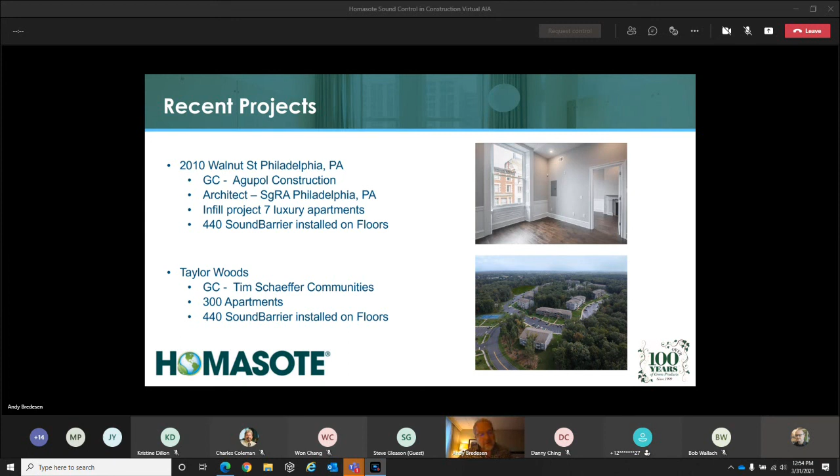Taylor Woods, another one in the greater Philadelphia area. Tim Schaeffer Communities, 300 apartments. There's some down in the DC area. So we did 14 buildings, 2/2 condos with Pulte over there off the last exit off the Dulles extension before Leesburg, and had great success with them. They saved 2 miles of 2x6 double plate, which they would have normally put up there, and they saved on engineering of those trusses.

City Center, Pleasantville, New Jersey, another project, 135 apartments. So we're getting more and more exposure, and it's just, it's so easy to call the guy who has a relationship with the general contractor, that guy being the gyp contractor, because he was there before sound became important as a leveling factor.

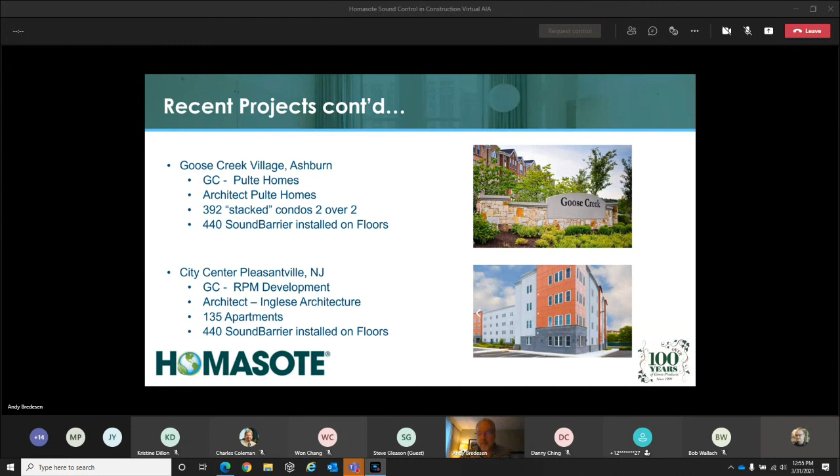We want to show you, this is just a 45-second video, that we have a relationship with BIMsmith. It's an online platform for you to use at no cost, where you can put together a floor or wall assembly in about 2 minutes instead of 30 minutes.

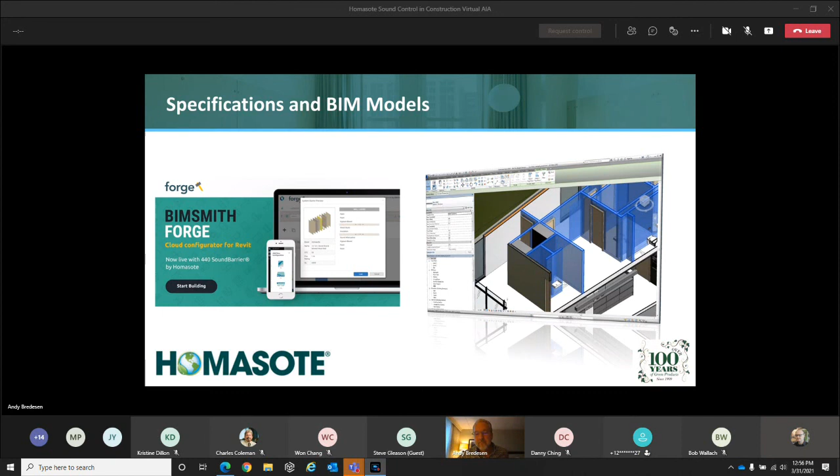For more than a century, Homasote has been the market leader in specialty floor, roof, and wall panel boards. No other fiberboard is manufactured like Homasote. The result is an innovative product of unmatched quality and engineering. Because of our dedication to these principles, we're excited to announce that we are BIM ready through the BIMsmith platform. Our 440 sound barrier is a uniquely high-performing product. With less material and less labor, you can expect better results. For more information or to access our BIM content, visit us at bimsmith.com/Homasote today. Homasote, sensible sound solutions.

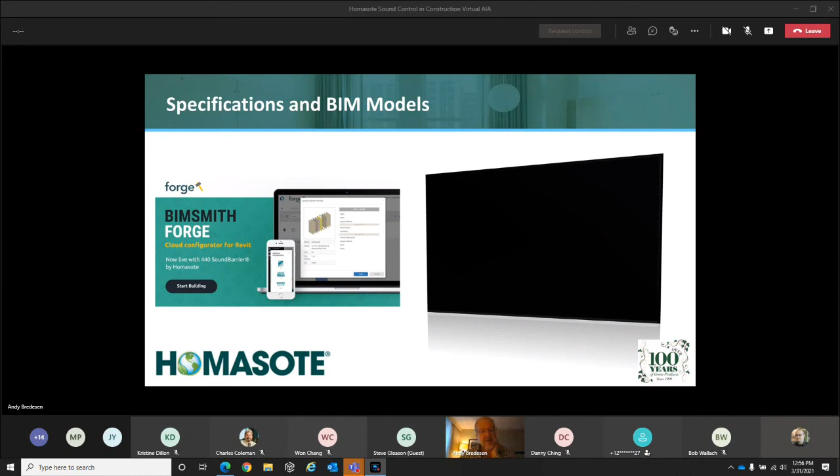It's an easy sign up if you go to bimsmith.com. They just ask for your email address, they don't ask for any other information. You make up your own password and then you have access to it.

Some of the other things that Homasote does: we take our 440 panel and we put a fabric on it, we call it DesignWall. We offer the Guilford of Maine recycled fabric in 3 different colors. There's many more colors, but we stock 3 different colors. We also offer a product called Pinnacle, where we take the 440 sound barrier in its gray state and sand it on one side.

It looks like a velvety finish, I call it industrial chic. Some people would buy that and just leave it raw, or it gives you a very smooth surface for painting. And then we also have another one where we put cork on one side of the Homasote, gives you that exterior cork finish. Again, all of the Homasote 440 is a great tackable surface that doesn't wear out.

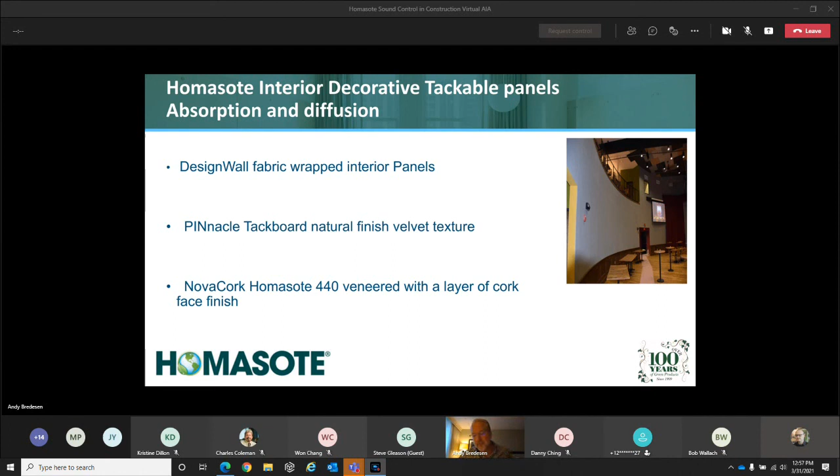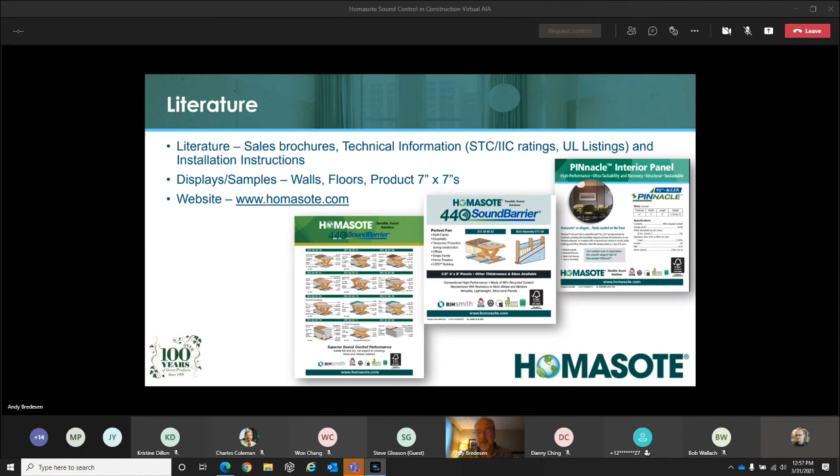We have a lot of literature in PDF form and downloads from the website. And if you ever need samples, we have these cute little 7-inch square samples of all the different products that we send to you. It really gives you a feel for what the product's made of and how hard it is. You think something made of recycled paper is going to be easy to break, but it is very dense. It is not easy to break.